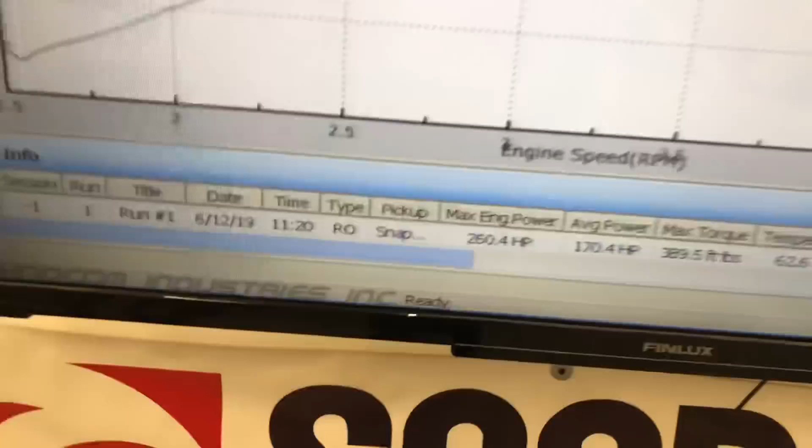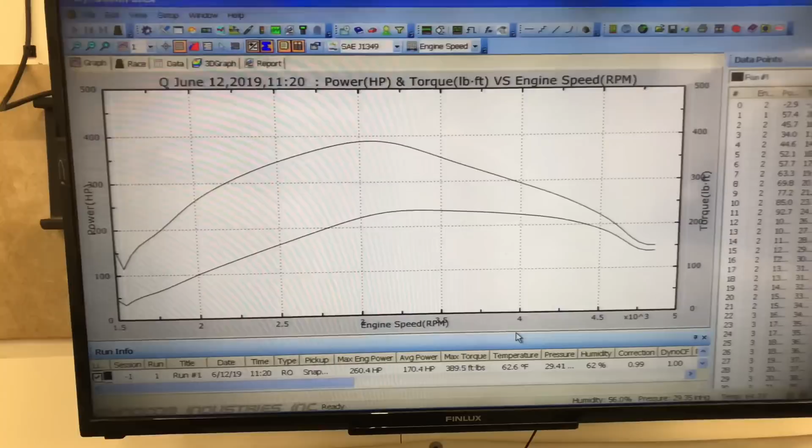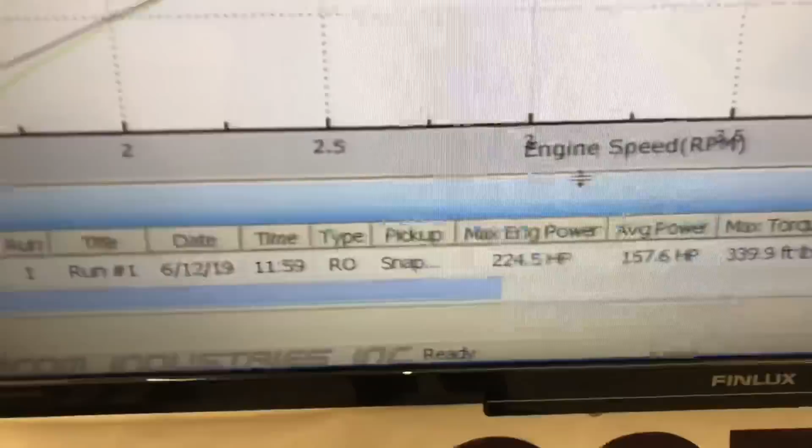So we'll get cracking. So this is the stock file compared to the last tune file. So we're at 224 horsepower now and 339 foot-pound of torque. There it's compared. And now we'll give it some workshop sauce and we'll see what we come up with.

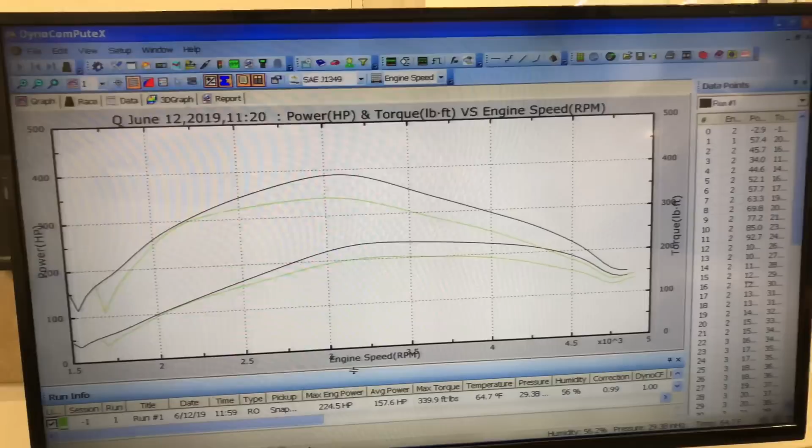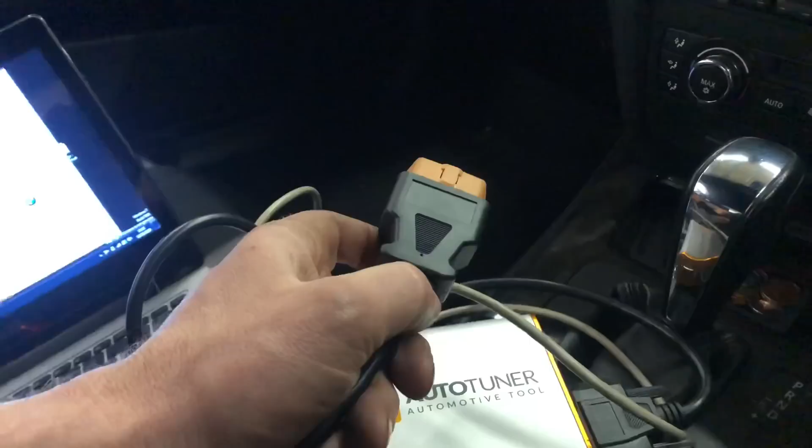Today's interface of choice is the Autotuner. We use this device and the laptop to take the engine calibration from the engine ECU so we can make our changes and upload it back on. And 99% of BMWs with Autotuner are OBD, so there's no need to interfere with the engine ECU.

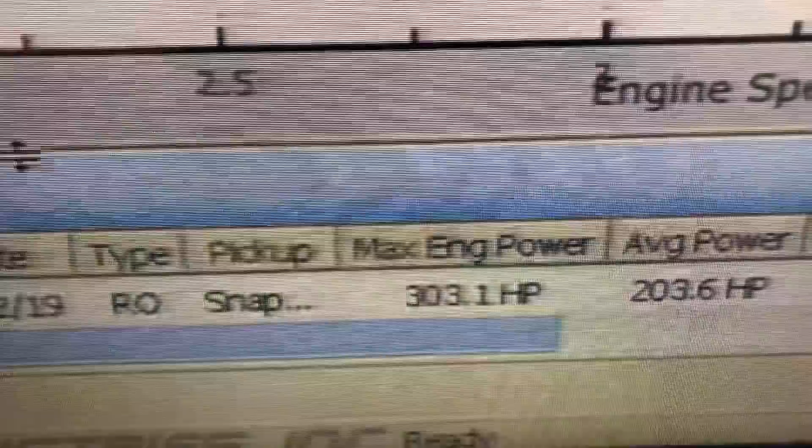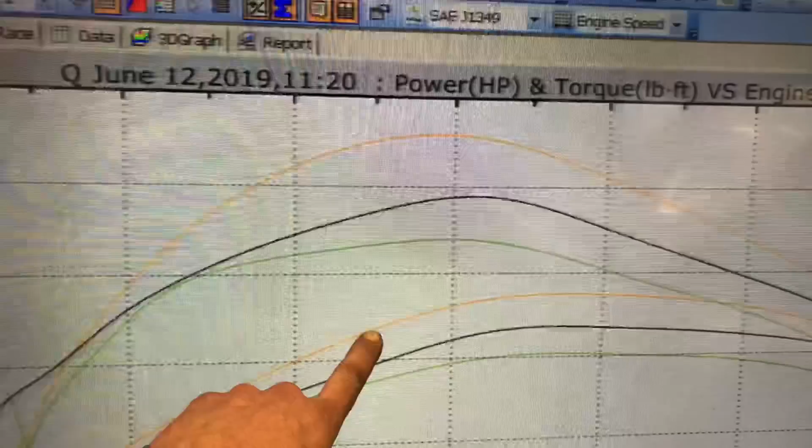So that's the car all done now. Here's what we came up with. It's 303 horsepower and 458 foot-pound of torque. And here's the graph for comparison. So we've got the stock, previously tuned, and our tune, which these are horsepower and these are foot-pound of torque.

So you can see the gains from one end to the other of the rev range. So it's a great result.